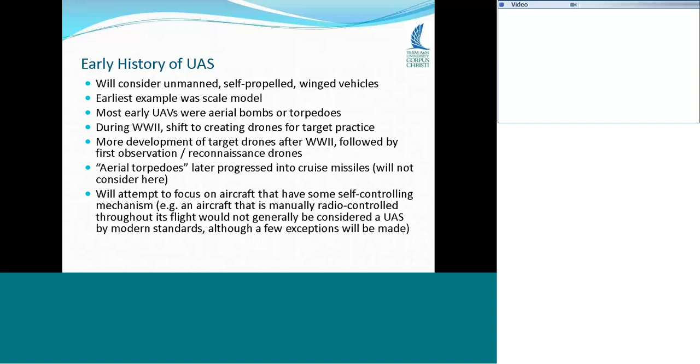Now, the aerial torpedoes later progressed into cruise missiles, which have been used for some years now, and I'm not going to talk about those here. That's a separate category. We're going to attempt to focus on aircraft that have at least some self-controlling mechanism. So if it's basically a model airplane that you fly manually by remote control all the time, early on, yes, unmanned aircraft, but these days, unmanned aircraft have really advanced beyond that. So we will make a few exceptions, as you'll see.

Okay, so again, this is more or less my definition, but if we go back to basically the beginning of manned flight, powered flight, we go back to someone named Samuel Pierpont Langley. He was the secretary of the Smithsonian Institute, the head of it. He was trying to develop a manned aircraft, and he was doing it at the same time as the Wright brothers. Now, he was generous. They wrote the Smithsonian, asked for reports on whatever had been done on flight, and he provided them what he had. But he was working on his own airplane.

And to begin with, he built a quarter-scale replica that flew unmanned over the Potomac River. Here's a picture of the model in the shop and in flight. It was steam-powered. In 1896, the number 5 unpiloted model flew nearly 3/4 of a mile after a catapult launch from a boat on the Potomac River. Just straight ahead, but it was stable flight, and it flew. It was powered. Just didn't have anybody on it. 10 times further than any previous heavier-than-air aircraft had flown.

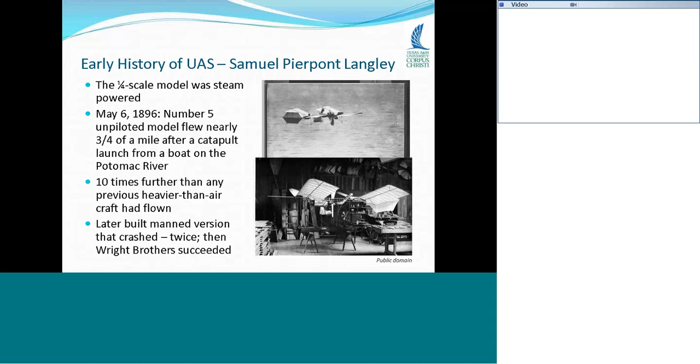Now, some years later, a guy named Curtiss came back and made some modifications to Langley's airplane and was actually able to fly it. That led to a dispute between the Wright brothers and the Smithsonian because they said Langley developed the first manned aircraft. Well, he developed it, it just didn't fly until Curtiss made a whole bunch of modifications to it. But anyway, back to the point of the lecture. To me, this is really the first unmanned aircraft. It's powered, fixed wing, flying on its own, no manual control by anybody while it's in the air.

Okay, it was stable, and you can make a stable airplane. If you've ever made a paper airplane, typically they're stable. They fly in a straight line. They recover. If they stall, they recover.

So you can make something that will fly. The problem is, how do you make something that will basically stay on course? If you're flying an airplane, like a paper airplane, you throw it and there's a wind blowing perpendicular to the way you're throwing it, it's going to move off. How do you keep an airplane on course?

So it was very early on. Remember the Wright brothers flew for the first time in 1903. Well, not too long after that, people developed the first autopilots. What they did was allowed the airplane to continue flying in a single direction, not being blown off course by the wind, and maintaining orientation. We'll talk about that in just a minute.

So in 1908, this guy named Elmer Sperry developed a gyrocompass, which is a compass, but it doesn't rely on magnetism. It relies on a gyroscope, a great big spinning gyroscope, and it relies on the concept of precession and the Earth's rotation to find true north. This was used in the Navy because ships are made out of a lot of metal, a lot of steel surrounding the compass, and that can really mess up a magnetic compass. But the gyro compass, that's not an issue, and so in 1908, Sperry is already working on this idea of using gyroscopes to give information.

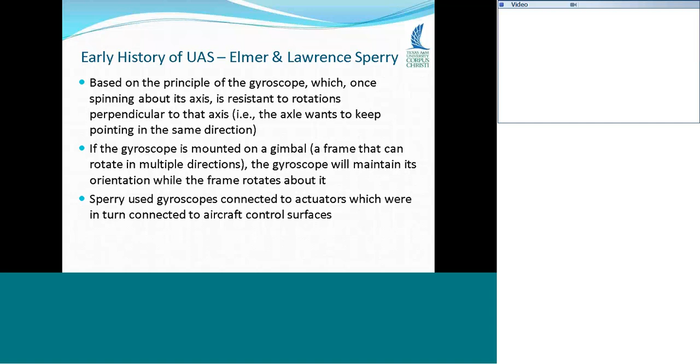And what Sperry did was take these gyroscopes, connect them to actuators, which were in turn connected to aircraft control surfaces. Here's an example: the green cylinder at the right-hand side is a gyroscope. It's spinning about a vertical axis, and then it's mounted in this gimbal thing. So that's always going to stay sticking straight up, unless the airplane does something really violent.

But let's suppose the airplane banks, one wing goes down, one wing goes up. Well, the gyroscope stays vertical. The airplane, this frame, moves around it, and so that rotates that little pan there below what are called the air jets. This was in Sperry's original system.

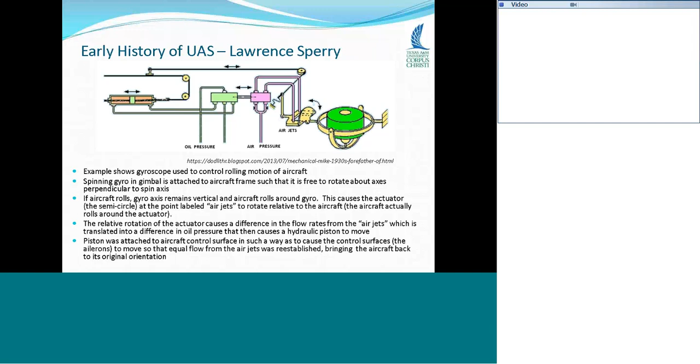But basically, it was designed such that if the airplane banked right, so the right wing went down, the left wing went up, the gyroscope would stay vertical. This thing was designed so that it would deflect the ailerons and cause the airplane wings to come back level. So the whole system, as we'll see in the next frame, was basically designed to maintain a particular orientation, a particular attitude.

All right, so here is the complete autopilot, schematically at least. You only need two gyroscopes, because not only will the vertical gyroscope handle roll if one wing goes up or down, but it'll also handle pitch if the nose goes up or down. You see there are two different rotating assemblies there: the one for roll that we just talked about, and also the one in the back for pitch.

You'll see that the vertical axis gyroscope, the top green cylinder, is connected to both the aileron, which controls the roll, and the elevator, which controls the pitch. So again, if the airplane tries to have some orientation other than wings level, nose level, it moves around the gyroscope. It causes these plates to rotate, changes the airflow, changes the oil pressure, moves the piston, moves the control surface.

Now the bottom gyroscope, the bottom green cylinder, is rotating about a horizontal axis that is pointing basically along the axis of the airplane, and that's the one that controls yaw, whether the tail goes left or right, or the nose goes left or right.

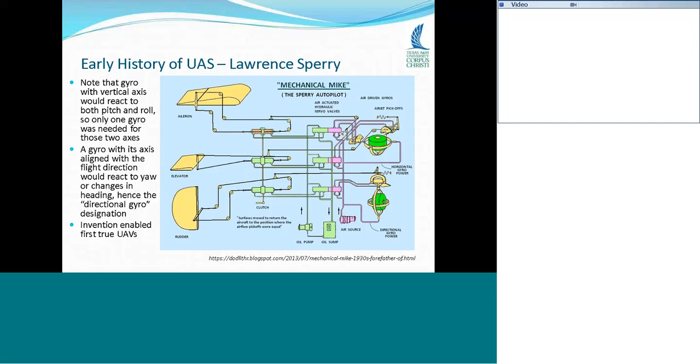Well, they tested this thing several times. They only had one successful flight, in 1918. They tried launching it from rails, and then things happened, and then they launched it from the top of a moving car, and they finally got a successful flight out of it. March 1918—this was the first time a full-sized, automatically controlled unmanned aircraft had actually flown. So this is not the Langley, which was just stable; it didn't have an autopilot in it. This was the Curtiss-Sperry aerial torpedo, an autopilot-stabilized aircraft.

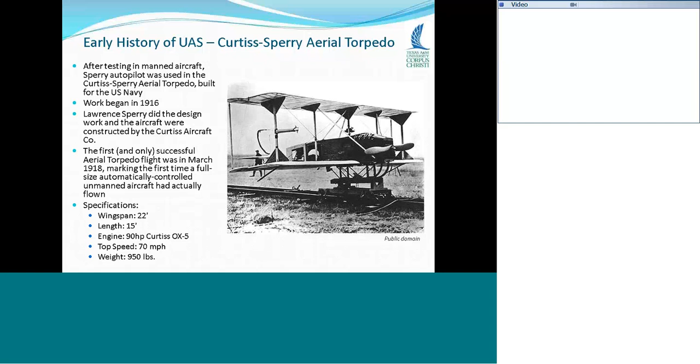Now on that subject, we're going to be talking a lot about aircraft dimensions because I want you to have an idea of the size of these things, how big they are. So here are some dimensions we'll be keeping up with. First, wingspan B—the symbol we typically use for wingspan is B—and that's just the distance from wingtip to wingtip. It tells you how wide the wings are. H is the height of the aircraft, L is the length.

There's another dimension that will become important later that we'll make use of sometimes: the planform area. If you look at the wing from the top, you see what's called the plan view or the planform. The area of the wing you see is referred to as the wing planform area, given the symbol capital S. We generally consider the wings basically being carried through the fuselage, so you imagine the wing going all the way to the center of the fuselage without the fuselage being there. That's what we consider the planform area of the wing.

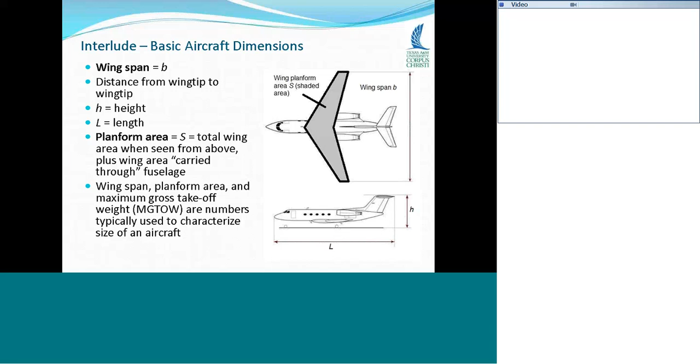So the wingspan, the planform area, and the maximum gross takeoff weight, MGTOW, just max takeoff weight, are numbers that we typically use to characterize the size of an aircraft.

Some aircraft you might have heard of: the Cessna 172, general aviation, length 27 feet, wingspan 36 feet, maximum gross takeoff weight 2,400 pounds—lighter than a car. Going down the list, all the way to a Boeing 747 commercial airliner: length 250 feet, wingspan 224 feet, planform area almost 6,000 square feet, and maximum gross takeoff weight of 975,000 pounds.

There are some aircraft that weigh over 1 million pounds and do have a maximum gross takeoff weight over 1 million pounds, but these are just some typical numbers. The F-15, which is a fighter, is 63 feet long, has a 42.8 foot wingspan, and an 81,000 pound maximum gross takeoff weight. So just some numbers of manned aircraft, some you might be familiar with, to give you a reference point when we talk about these other aircraft.

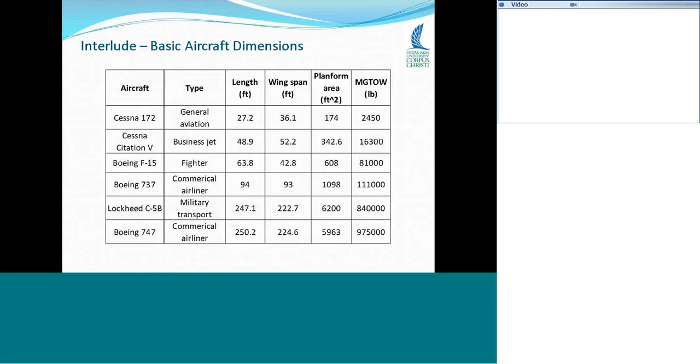So the next controlled unmanned aircraft was the Kettering Aerial Torpedo, or the Bug. Again, the idea was extending the range of artillery—basically carrying a bomb further than you could shoot it with a gun, and also a heavier load than you could carry with a manned aircraft. Heavy bombers were beginning to be developed, but they weren't quite there yet.

So the idea of this aerial torpedo: it's powered by one 4-cylinder, 40 horsepower engine. It was basically one-time use, so it was constructed of wood laminates and paper mache, while the wings were made of cardboard. But it had a Sperry autopilot in it. Total cost per plane was $400. This is about 1917 when it went into production or was being developed. It didn't get developed before the end of World War I, so they built some and then it didn't go into full production.

What they would do is launch it, and it would maintain its direction and course because of the autopilot on board. There was a timer connected to the propeller, and when the propeller completed a certain number of revolutions, that meant it had flown a certain distance—so it would say, okay, I'm there.

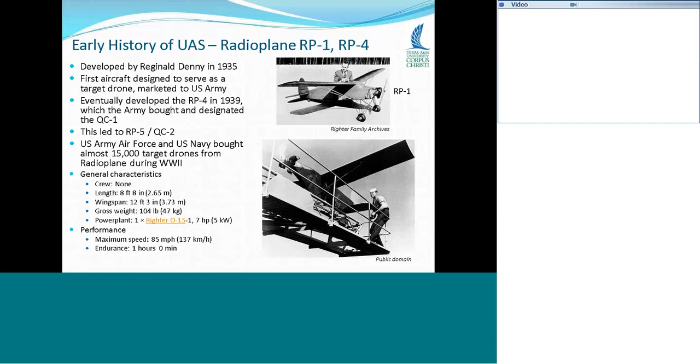Regarding radio control, it took a while for radios to get small enough to mount in things like remote control aircraft. Radios were big, so you rarely saw them in World War I aircraft because the radios and the batteries or generators they needed were so large. It just took time for radio technology to shrink enough to be mounted into an aircraft. This was also around the time, right before and during World War II, that radio-controlled model airplanes started becoming popular.

Okay, so here's the QC4. So it has this V-shaped fuselage, which you see here in the one on the ship. And then you see one that's been used. It's actually been shot down, so it's going down. It's on fire. It's basically got a fabric covering over a wooden frame, and the fabric is just about all burned away, so you can see the frame. But there it is, fulfilling its function.

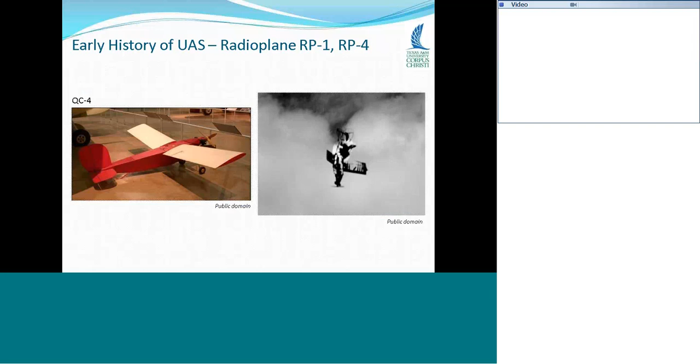Now, just a little bit of trivia, nothing serious here, but their factory was in Van Nuys, California. And in 1944, a U.S. Army photographer named David Conover was sent over to photograph the radio plane factory, basically where they're putting things together. And he finds this woman. Her name was Norma Jean, and took a picture. She was working on assembling these aircraft. You see her there, with a propeller posing, but she was actually working on assembling these aircraft.

And he was a photographer, so he said, well, you've got potential as a model. So I think he gave her a business card, put her in touch with another photographer. Well, she became famous, eventually became an actress, and changed her name to Marilyn Monroe. You might not have heard of Marilyn Monroe. Your parents may have. Your grandparents definitely have. So we can thank the unmanned aircraft industry for Marilyn Monroe.

Another little bit of trivia. The Army photographer was sent over by an Army captain named Ronald Reagan, who would go on to become President of the United States in 1980 and be reelected in 1984.

Okay, so another target drone, another one developed from a full-size aircraft. This was the N2C-2 target drone developed by Curtiss. The basic aircraft was developed as a trainer in the 1920s. In 1937, they developed a radio-controlled version of it, again, for use as a target by anti-aircraft batteries. Now, it was controlled from another aircraft. It's called the TG-2. It was in service by 1938.

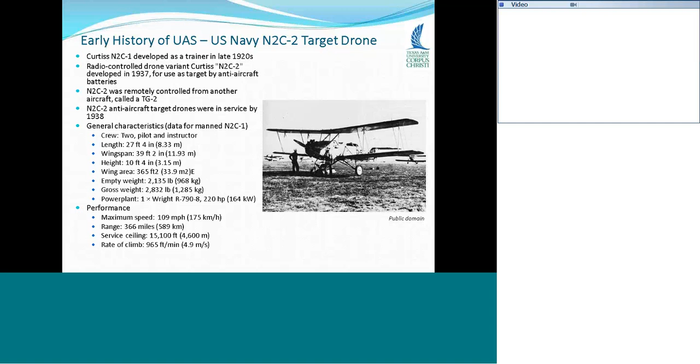Now, I'm sure that if you were the pilot of the TG-2, you made sure there was plenty of separation between you and the target drone, and you made sure everybody on the ground knew which of the airplanes they were supposed to be shooting at, right? Okay, so you see how big it is. Again, it's a big airplane, 39 feet, 2-inch wingspan, gross takeoff weight 2,832 pounds, range 366 miles. Don't have an endurance there, but several hours in the air. Okay, so that was just a target drone.

Okay, now we are going to talk about the beginnings of cruise missiles, and basically, the bug was basically an aerial torpedo, a cruise missile, basically. Well, the Germans developed the first jet-powered cruise missile. Now, it was powered by pulse jet. We'll talk about that in a little bit. They started flying these things in 1942. The fuselage was made out of steel. The wings were built out of wood.

So they had a weighted pendulum system to provide fore and aft attitude measurement that controlled the pitch, where the nose went up or down. Then a gyro compass and a magnetic compass together were used to control roll and yaw. That would basically keep the airplane on the correct heading. There's a little propeller on the front. Again, we're at this business with propeller, and every time it turned 30 revolutions, the counter would go down by 1, and when the counter got to 0, that meant it was basically over its target.

And so, again, we have bolts here, but these were detonating bolts. 2 spoilers on the elevator were released, so all of a sudden you got a lot of drag on the elevator, which is the back surface. The linkage between the elevator and the servo was jammed, and a guillotine device cut off the control hoses to the rudder servo, setting the rudder neutral. So all this stuff basically meant that the V1 went over nose down in a steep dive. So basically it maintained its heading, but just dove very steeply. It presumably tried to hit its target. They weren't extremely accurate.

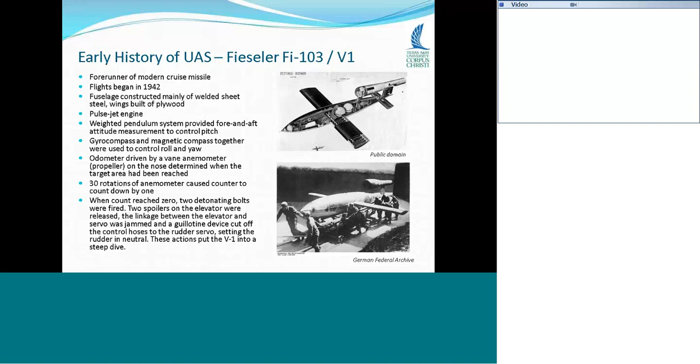They're basically referred to as terror weapons because the primary purpose was psychological. They did damage, but they did damage to cities. So they killed and hurt people, but they didn't knock out important factories or anything like that. So they were basically just weapons against the civilian populace.

Okay, so pulse jet, interesting device. Basically, it's a cyclic jet engine. So some fuel is injected and some air is drawn in, and then the fuel is ignited, so it explodes. Now, these vanes that let the air come in on the left are basically forced shut. So the pressure pulse that comes from this explosion pushes against the front of the engine, but there's no pressure resistance to the back, so you get a push toward the front. So you get a thrust push.

And then the products of combustion are exhausted, and when they're exhausted, this outflow causes the vanes to open again, and then more fuel is injected, it explodes, the vanes are pushed shut, there's a little pulse of thrust to push the plane forward, stuff goes out the back, the vanes open again. So this goes over and over and over, but it happens very rapidly, so 50 times per second.

Now all this has to be tuned very precisely. The length of the engine and all this other stuff is tuned very precisely, but when it works, you get thrust out of it. Now they're very loud, and because of this oscillating, that's where the aircraft actually got its nickname, the buzz bomb, because this thing is oscillating, vibrating. Okay.

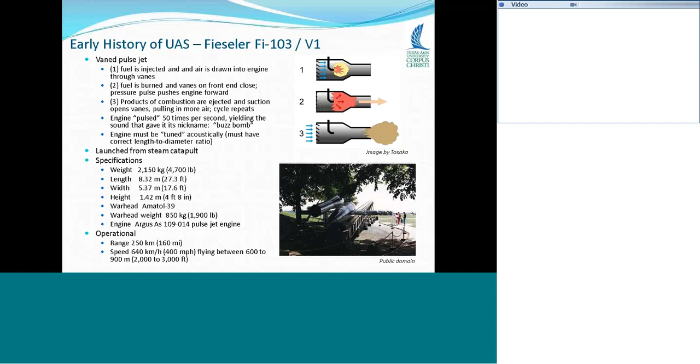So they'd try to intercept them before they reached populated areas, tip them over, and cause them to crash into the ground. They would explode and there'd be damage, but if they were outside of populated areas, that was okay. Okay. So we've done targets, we've done aerial torpedoes. We did aerial torpedoes and targets and an aerial torpedo again.

Now we're going to look at an example of an unmanned aircraft that was specifically built for observation or surveillance. Okay. This was the RP-71 Falconer, developed by Radioplane. They stayed in the business, and eventually they were actually bought out by Northrop. Okay, so they were a successful company, and eventually were bought out by another successful company.

You see the white objects alongside the fuselage under the wings. Those were rockets. This was rocket-assisted takeoff. So basically, it'd be put on a stand, what was called a zero-length launch, so it could be launched without having to have a runway, and then was recovered by parachute. It's under radio control the whole time. I believe it had a still camera system. It would fly over somewhere, take photos on film.

I know some of you may not even be familiar with this concept of film, but that's the way cameras used to work. There was a stuff called film, and you would shine light through a lens on the film. You bring it back, you develop the film, and then use the film to make prints. So it was kind of a laborious process. It took a while, but this was one of the first uses of unmanned aircraft for reconnaissance. Go out and look what's going on out there and come back and bring us a report.

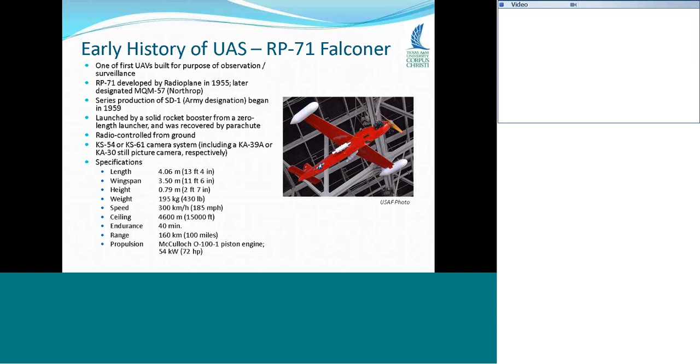So you have to be careful when you look at the term range, because for manned aircraft, range just means how far you can fly the thing before it runs out of gas, whereas with an unmanned aircraft, range may mean how far it can fly. It may mean how far it can fly and still be in radio contact. So you just have to be aware of that distinction.

Okay, now another application, which came along about the same time. The Falconer, the one we just talked about, was about 1955. So, B-52s, very large bombers. They were used in the Vietnam War. A lot of them were getting shot down by the surface-to-air missiles of the North Vietnamese. So the Air Force and McDonnell Aircraft Corporation came up with the ADM-20 Quail, which was a radar decoy.

The way it was built, it would basically have the same radar signature, or the same radar cross section, as a B-52. If a radar painted it, that's the term that's used, if the radar beam hit it, then from the reflection coming back, they would say, oh, it's a B-52, when really it was just this thing. And in the next slide, I'll show you the relative sizes.

Now, it had an autopilot integrated with a rate integrating gyroscope, and we'll talk more about that later. Basically, you could detect the rotation rates due to the precession of the gyroscope, and then you could integrate that in time to get angular position, so you could get heading.

This thing could be programmed to execute 2 turns and 1 speed change during a flight time of 45 to 55 minutes. So it could basically look like it was going somewhere. You wouldn't just drop it and it would just fly straight. It would actually look like it was following some kind of mission profile. Carried in a B-52 bomb bay and then launched during flight.

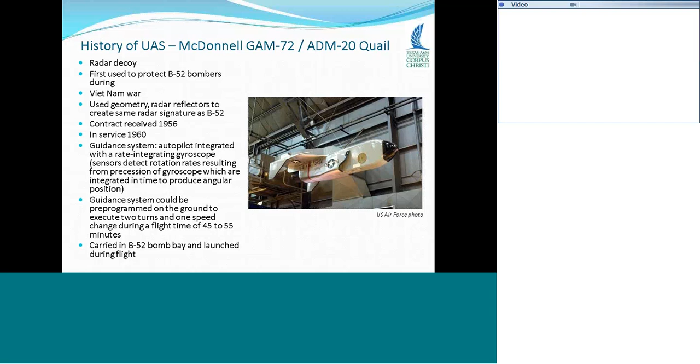Now, remember, it's supposed to look like a B-52 to a radar operator, which means not only does it have to have the same size, it also has to have the same performance. When it starts flying, it needs to look like it's flying like a B-52. Because if all of a sudden it's flying a lot slower and lower, well, that's weird, we know which one's the B-52 because it's flying at 50,000 feet and close to Mach 1. Well, this Quail had to fly that.

So it could fly at an altitude of 50,000 feet, which is where the B-52s flew, and it could fly at a Mach number of 0.9, basically about the same as the B-52 at that altitude. So basically the idea was it's a radar decoy. The tracking radar on the surface-to-air missiles will lock onto this instead of the actual bomber. If this thing got shot down, you don't lose a crew, you don't lose a big bomber, you just lose one of these unmanned aircraft.

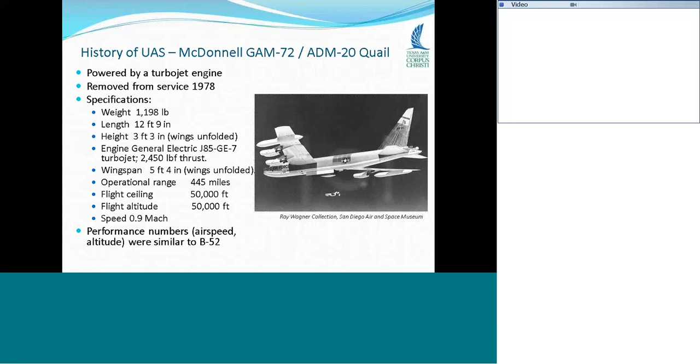Okay, so that's the end of the lecture. In the next lecture, we will continue to look at the history of the development of unmanned aircraft. That concludes the lecture.